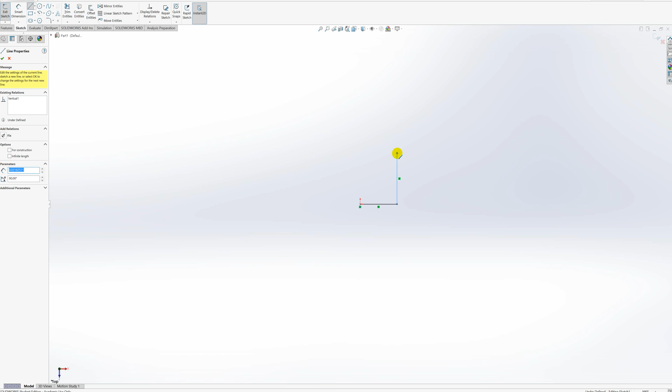We'll sketch a horizontal line and then a vertical line. We'll click Escape to get out of drawing lines. Your lines will be horizontal and vertical if they have these symbols next to them.

Let's dimension these two lines. The horizontal line will be 0.05 meters and the vertical line will be 0.1 meters.

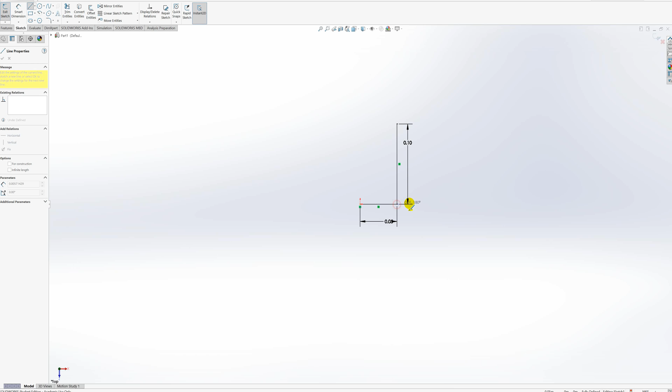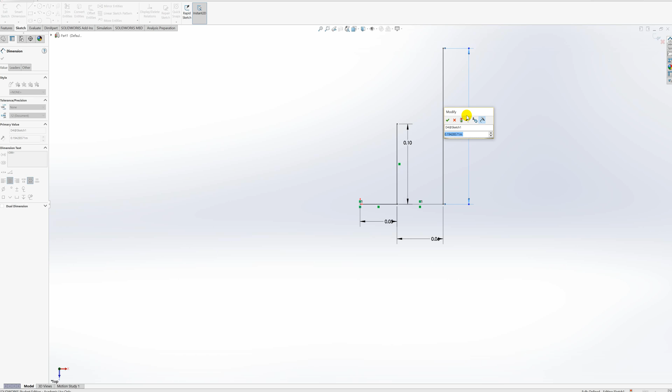We're going to draw a couple more horizontal and vertical lines. Once again, hit Escape, go to Smart Dimension, and then we'll dimension these two lines as well. Let's dimension the horizontal line to 0.0625 meters, and the vertical line to 0.175 meters.

Now notice it rounded these off. If you were looking at the sketch after we've done all this, you'd notice you have 0.18 instead of 0.175, and if you didn't know that you originally specified it as 0.175, you'd believe that was the true dimension.

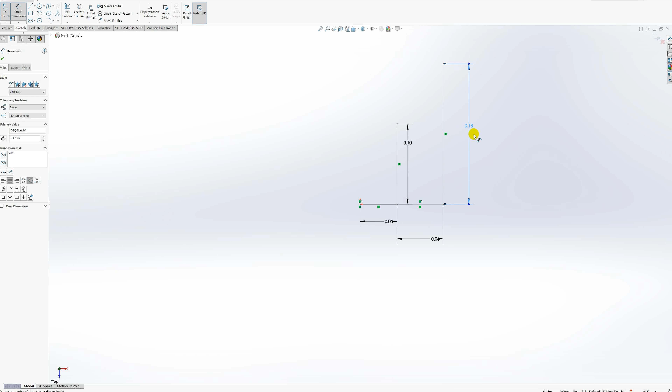You could double click on that to bring up the whole dimension and it'll show you this value, but let's take the guesswork out of it and change the precision to the amount that actually reflects the true dimension, which is 0.175. You do that under the tolerance/precision section. You could do 1 decimal place, 2 decimal places, up to 8 decimal places.

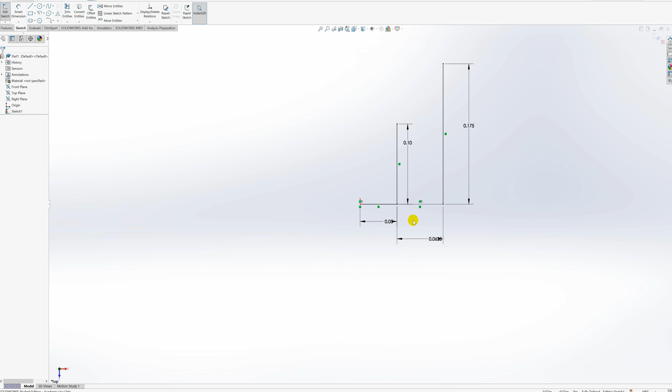So let's do 3 decimal places because that reflects the true dimension there. And notice this one was 0.06 instead of 0.0625. So we will edit this one to 4 decimal places. And there we go.

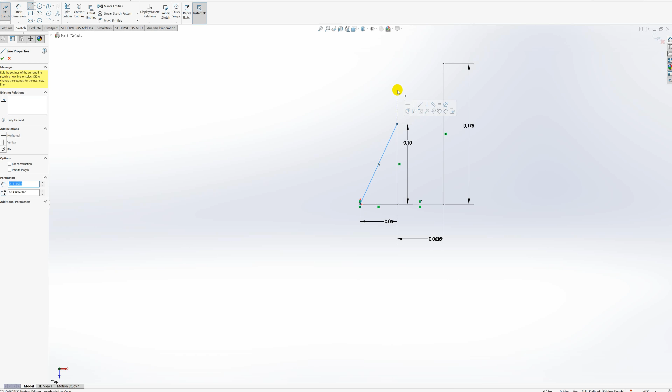Now that we have those lines drawn, all we need to do to complete this sketch is start at the origin. Whoops, that's an arc. Start at the origin, click on the top of the first vertical line, then we'll click at the top of the first vertical line again, and then we'll click at the top of the second vertical line. Click any green check marks that you need to get back to this screen.

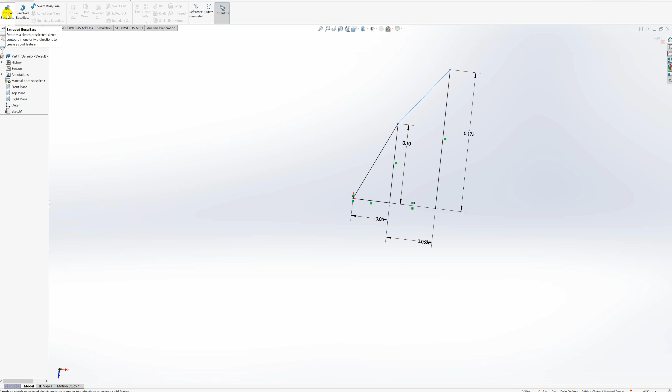Now that our sketch is complete, we will extrude this fin by 0.01 meters, 10 millimeters. You click Extruded Boss/Base. Since your sketch has 2 sections to it, you can click each section to extrude that section, and it'll recognize that you want to extrude the whole thing. Depth is already 0.01 meters, so we'll click the check mark, and now we have our extruded fin.

Now, our rocket's fins shouldn't have sharp edges on the top like this, so we're going to smooth those out with a chamfer operation. To chamfer an edge, go to the arrow under Fillet, click it, and then select Chamfer. Under the Chamfer Parameters box, this is where we select all the edges that we want to chamfer.

We're only going to do 2 at a time, because if we do 4 at a time, we'll get some weird geometry. I'm not exactly sure why, and there's probably a way to fix it, but I don't feel like investigating that right now. So we click the box. By default, it's already highlighted, and we're going to control click these two faces.

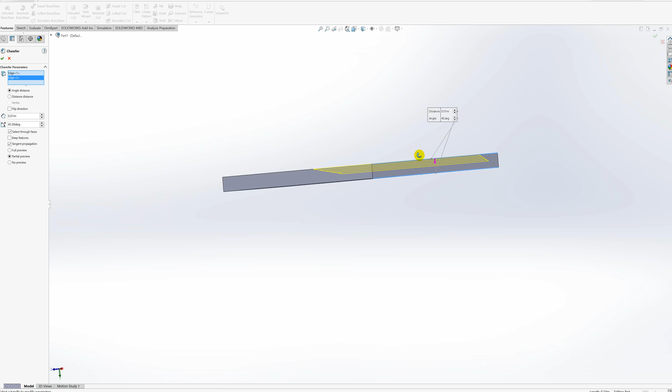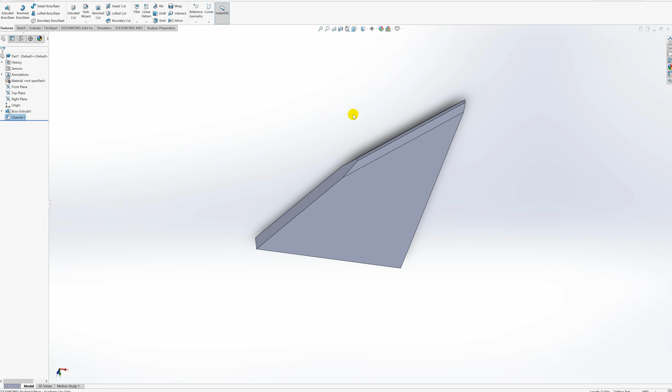Notice that the preview has a depth of 0.01 meters, which is far too much. The fin will just be super pointy by then. So we're going to change the depth to 0.00375 meters. We'll hit enter and then the check mark to generate it.

Notice these are nice and, well, not rounded off, but they're edged to avoid those sharp edges. This is what you would get if you sanded the original fin.

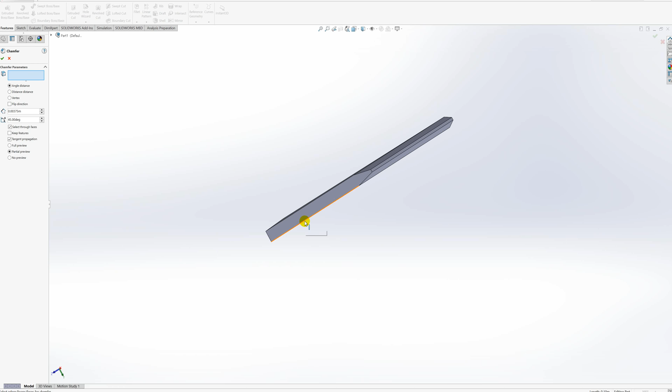Okay, now let's do the chamfer for the other two edges. We'll control click these two edges this time.

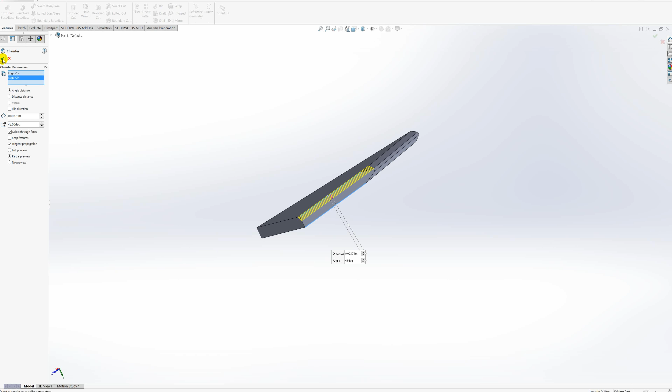Notice even though the preview is only shown for one fin, both fins are selected. Always go by what's in this box, not what's on your screen. The depth is the same because SolidWorks automatically carries it over.

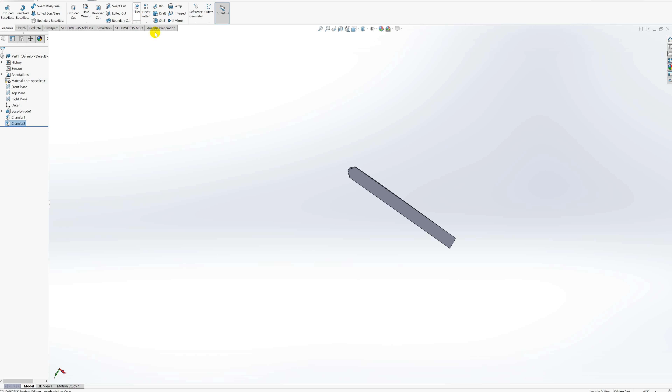There's our chamfered fin. So if you had the regular fin, you would sand the edge that was formerly right there, and you get that flat face, and you sand that edge to get that flat face. Alternatively, you could sand to round it, which is a fillet.

But anyway, we're done there, so we're going to make a hole for the connecting rod that will extend into the body of the rocket. To do that, we'll make an extruded cut on this face. We'll select a circle because we want a circular hole.

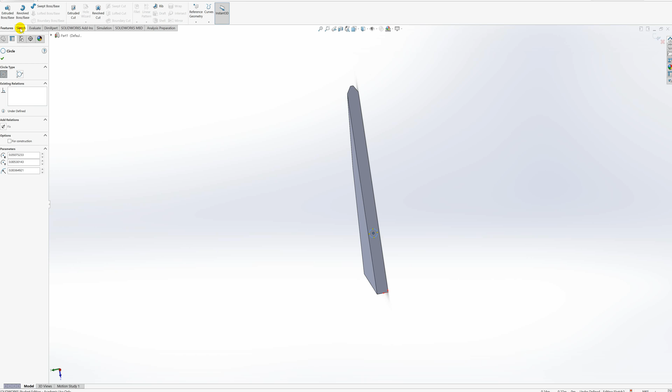A little side note, you may have noticed that there was a hole wizard up here. We don't want to do the hole wizard because that's better for things like screws. If we just want a plain old circular hole, we do an extruded cut.

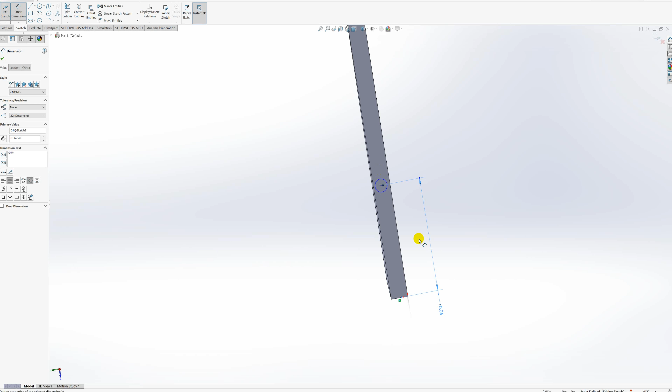So you can place a circle anywhere because we want to dimension this next. So to dimension, go to Smart Dimension, click the center of the circle, then click the bottom of this face. Place that dimension so that it's specifying the distance from the center of the circle to the bottom of the fin. We're going to specify that as 0.0625 meters. Notice it automatically changed for you.

Once again, we have a 0.06 dimension there. We don't want that. We want 0.0625.

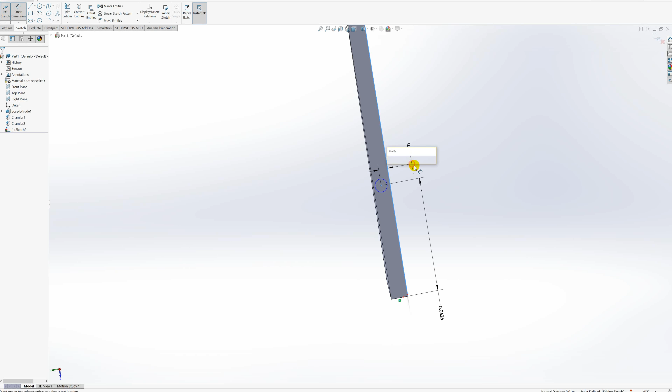We'll place that dimension. We'll Smart Dimension once again, but this time from the center of the circle to the edge of the fin extrusion. This one will be exactly 0.005.

And now this circle is perfectly centered on this fin. Now notice this rounded up, and that's terribly misleading. So we're going to change that to 0.005. There's probably a way to change that default, but I'm going through it manually so that you don't forget.

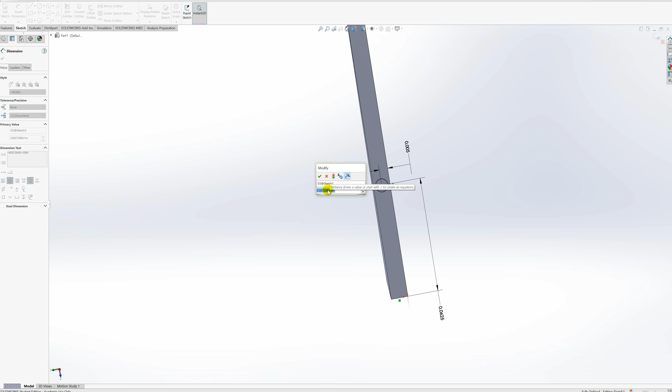There's one more dimension that we want to place. The Smart Dimension, click the outer edge of the circle and specify the diameter, 0.0075.

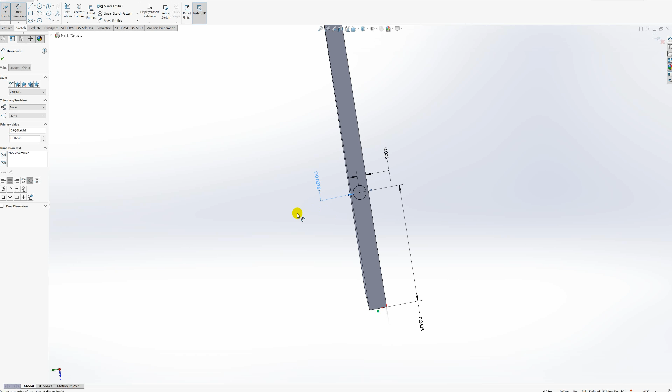Notice that rounded up again. We're going to change that. Okay, now this thing is fully dimensioned. We know its distance from here, we know that it's centered by that dimension, and we know its diameter. Fun fact, that's the ANSI symbol for diameter.

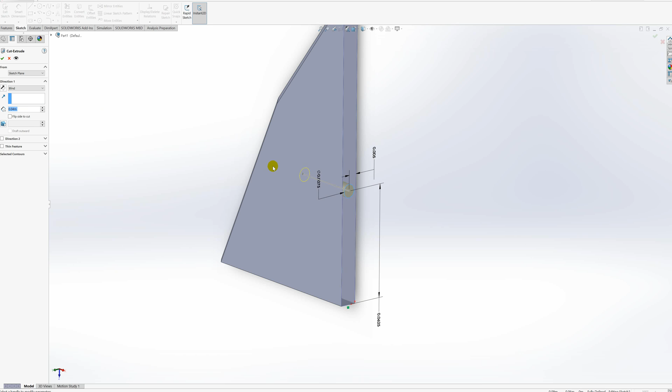Alright, now that we have that sketch, let's exit the sketch. And since we clicked Extruded Cut before sketching, it already knows to extrude the cut. We'll specify our depth as 0.04 meters instead of 0.01. Click the check mark, and we have our 0.04 depth hole.

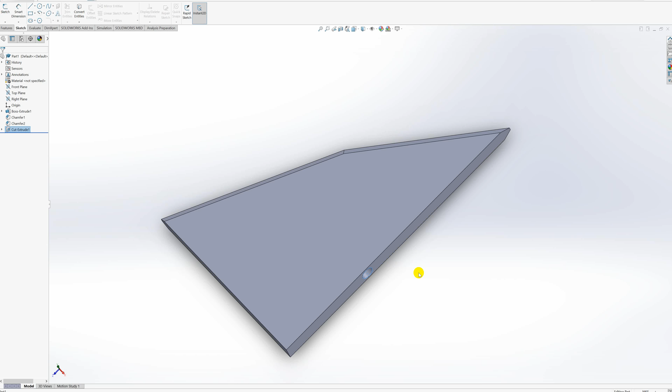Now we're pretty much done with our fin in SolidWorks, so we're going to save it as two different file types. One for the assembly later on in video 5. You'll want to save that file, or I'll provide once we get to that point for video 5. The other file type will be for ANSYS.

So we're going to go to the Save As button. The most convenient place for me right now is the desktop. So I'll save this as SolidWorks fin. The first file type is the SolidWorks part, that's .prt or .sldprt. I believe other CAD programs can read .prt, like Creo Parametric, for instance, which I also have installed on this computer.

Alright, now that's saved, we'll save as again, but this time we will change the file type to a Parasolid, which is .x_t. You can keep the same file name because it's a different file type, and we'll save that. Export all bodies. You always want to export all bodies.

Now that we're done with that, we'll close SolidWorks and we'll launch Workbench. You'll want to make a static structural simulation, and we're going to jump right into engineering data before we do any geometry.

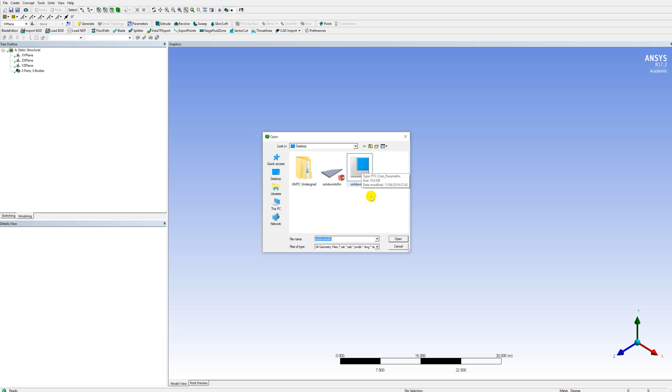Okay, to insert your Parasolid, go to File, click Import External Geometry File. There's this open dialog box. It says the type is PTC Creo Parametric, but that's just a feature on my computer, because I've used PTC Creo to make Parasolids before, it automatically assumes it's from Creo, which is a terrible assumption. Let's double click that. Double check that it's a Parasolid.x_t. Click the import feature and hit F5 to generate.

Okay, the only thing we'll be doing to this fin in geometry is rotating it by 20 degrees. So to do that, we'll first note that the longitudinal axis of the fin here is aligned with the z-axis. If that's not the case, then you're kind of SOL. If you're watching this during a simulation video, you'll have to ask me what to do next. But this should be the default. It'll be aligned with the z-axis if you sketch it on the top plane in SolidWorks, which I hope you did.

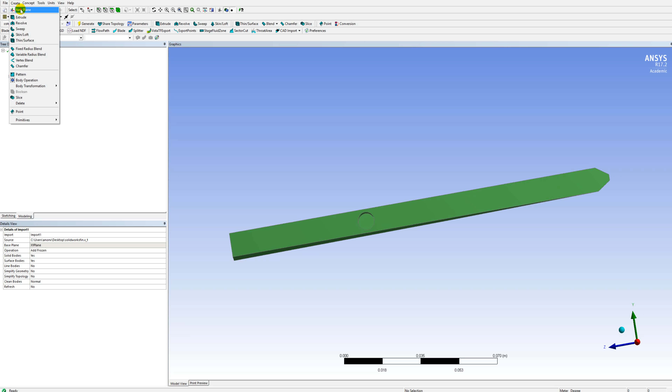Okay, now to do the rotation, we'll need to create an axis about which to rotate. The easiest way to do that is to make a plane. So just go to new plane, and we'll insert a new plane in the outline. For the type, we want from face. For the base face, select the bottom face of that hole we made earlier. Click apply. Then select the plane and hit generate.

Notice a new coordinate system popped up here. But that coordinate system will only be in Design Modeler, it will not carry over to setup. So if you want a coordinate system in setup, you'll have to make it there, not here.

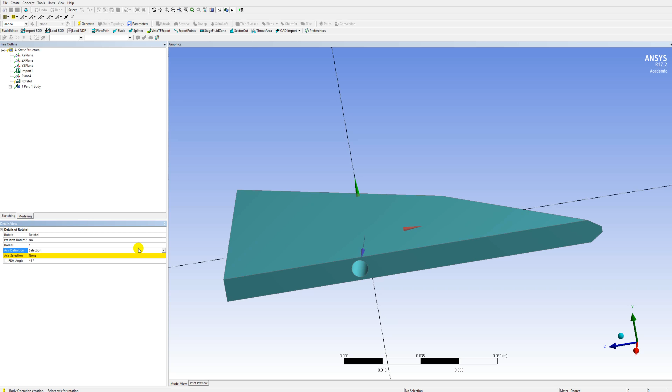Alright, to do the rotation, go to Create, Body Transformation, then Rotate. Select the entire fin for the body, and for axis definition, go to selection, make sure that's checked, then click the axis selection box and select the plane. Notice this big red arrow is our axis. Click apply, and that's the plane normal vector we just selected to rotate about. That's exactly what we want, because in real life the fin will be rotating about this hole, because this hole is where it's attached to the rocket, and that hole will have a rod through it connected to a motor that rotates the fin.

In the angle box, let's do 20 degrees. Notice if you put a negative in there, negative 20 degrees will rotate it up. This is what we want it to look like. Let's generate that rotation. So now our fin is tilted 20 degrees in the negative y direction. There's our z-axis, and there's a 20-degree angle right here.

Alright, that's exactly what we want from geometry, so we're going to close that, and we're going to go to Model.

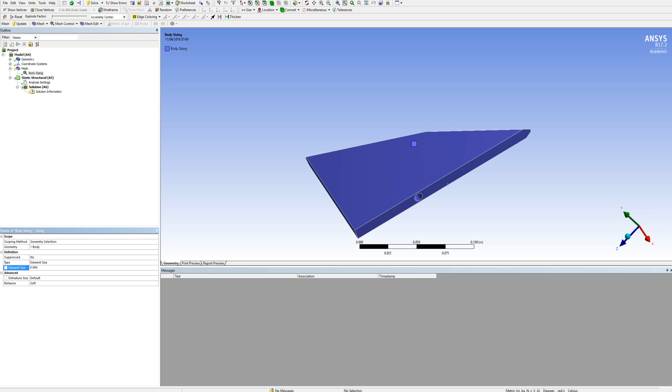For element size, we will do 0.004 meters. Hit enter, we will generate mesh. Update will also work for that. Check your node count, you should have around 24,000.

Okay, next thing we will do is specify the material. It's nice to do this first, otherwise you'll probably forget. I forgot the last time I recorded it, or attempted to record this. So just to do that, go to material, then choose your material from there.

Now the material's chosen and the mesh is done, let's insert a force. The geometry that we'll be applying this force to is the top face. We don't want to define it by a vector, we want to define it by its components.

Now, if the rocket itself is pointed in the negative z direction here, and there's this 20-degree angle, we want our force to be in the positive z direction because the rocket will also be traveling in the z direction. So the force from the air will be hitting our face at a 20-degree angle here.

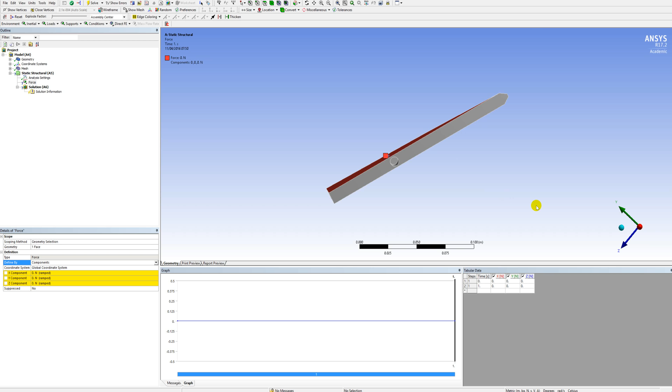That's why we've rotated it. And I hope you can see that some of that force will be deflected, or some of the air flowing over this will be deflected this way, which will cause the rocket to rotate about the z-axis in a clockwise fashion. Clockwise from the negative z-axis here.

So we're going to define the z component of our force as 1,000 newtons. Make sure it's pointing down. Note that this is the positive z direction. Down is the positive z from the way we've defined our geometry.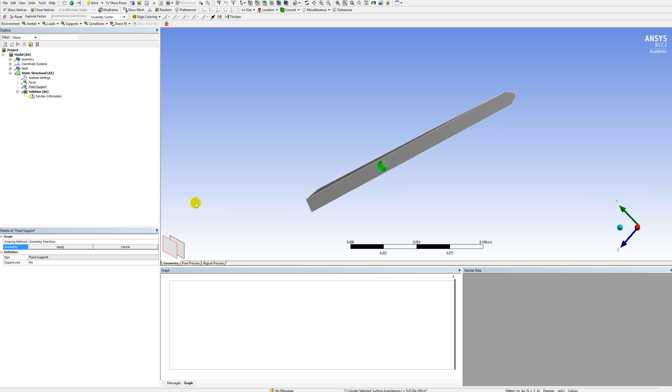Alright, our force is fully inserted, so we will go to fixed support. The thing that will be holding our fin to this rocket is the connecting rod, and the point where this touches the connecting rod is that face. So we'll select that face and click apply.

We will insert under solution, we will insert stress and strain. Actually, I did strain first, I'll do stress last. Everything should be fully defined, so let's solve this system. Should take about 10 seconds. Or less. There we go.

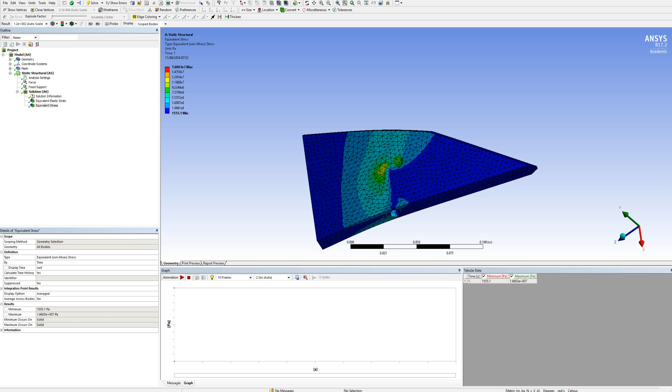First, take a look at stress. Notice that our force is on this face, although the centroid was probably about right here, so most of the force would happen there. Also, that might have been where I just clicked it.

I'll have to figure that out later. But in reality, once we're experienced with fluid simulations, we will transfer the force from that fluid simulation onto this face. I just specified it arbitrarily because I got some numbers from a fluid simulation I ran earlier.

So take a look at the stress. Analyze it using your experience from the past videos. Notice that it's most likely the fin is most likely to break on the inside surface of the hole and where the force was applied. If you switch to strain, you'll notice that most deformation is also around those areas.

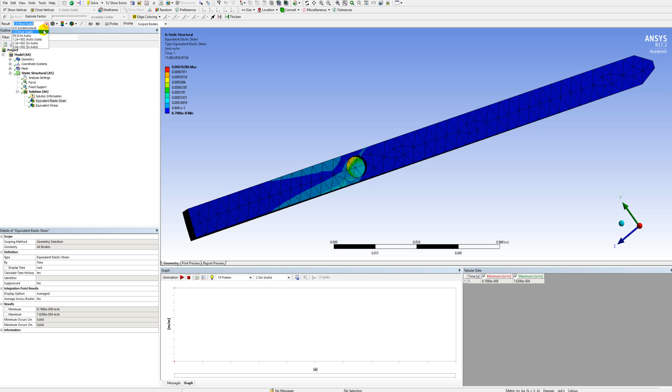And something that you can do is switch the scale between undeformed and true scale to notice the actual deformation. It's not going to be a lot. So on this high-res monitor, I'm going to switch. Some of the pixels changed places by just a little bit.

I'm not sure if you can see it on the video, but I can see it a little bit. I suggest you try this on your own. Your monitors probably aren't 4K in resolution, so you might have a hard time noticing it, but that will be the actual deformation.

And if you want to get a feel for the general way this will deform, you can auto scale it up. Notice that the max strain is about 7.6 times 10 to the negative fourth, and that's in units of meters over meter. It's about right there, so we'd expect the most deformation to occur there.

For this situation, okay, that's pretty much it for the video. In the next video, we will be making 3 more of these fins. Don't worry, you don't need to make 3 new parts. We can just copy them.

We'll make the body of the rocket, we'll make these connecting rods, and we'll connect everything using mates and rotate them accordingly, and rerun this static structural with more forces and pressures, maybe even a temperature thing. I'm not sure yet because I haven't made that video.